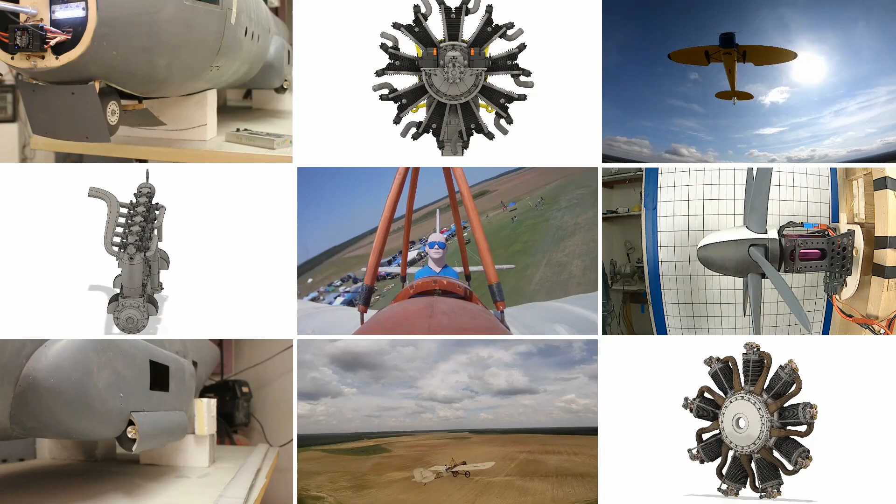Long story short, one of you followers reached out to me and said, come on Dag, why don't you do something exciting with that wall behind you with all the years you've done model aviation. So I thought, I'm going to go into all the parts and pieces I've collected over the last 40 years, like my first 3D printed radial engines on the wall. I have propellers from 049s all the way up to my 150 kV electric motors I use. I've got props I designed myself. So everything on that back wall is kind of a little bit of my history.

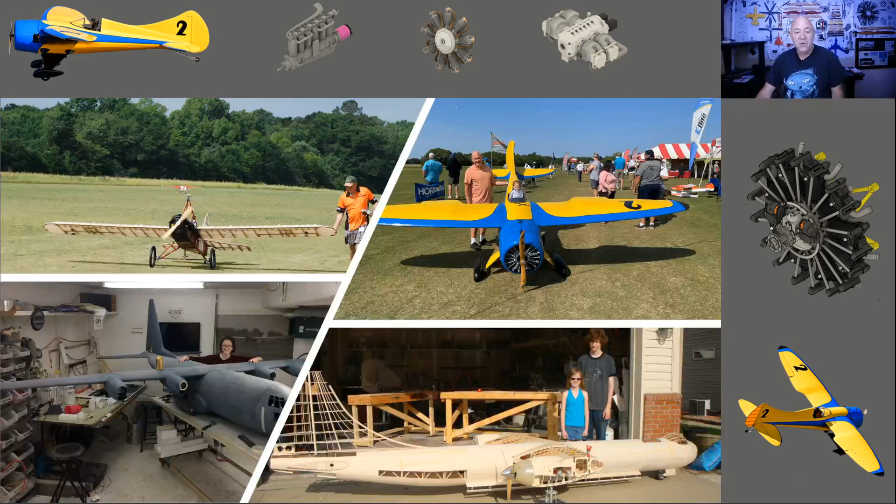If you don't know who I am, my name's Dag, and I'm obsessed with giant scale electric model aircraft. I've been doing this about 12 to 15 years. I got into electrics about 15 years ago, but I've been into the giant scale stuff for about 12 years, and I love to design my own airframes.

I would create a lot of videos on my YouTube of me designing and building my airplanes. A lot of people started saying, hey, why don't you just do videos answering people's questions and telling us how you design things. The purpose of my YouTube is to share my experiences, successes and failures. I hate it when people say, oh try this, but they've never done it, and then you try it and you fail, and you're like, well, that was a waste of money.

So I try to help people understand my path in this model aviation world and in full scale, because I'm building an ultralight too. But everything I try to represent here on my YouTube is things I've done myself. So if you follow what I do, you can have success. Now, if you follow some of my failures, you'll probably have some failures.

But the reason for this video is, I'm not really sure how to explain it, but I created a Patreon. And the reason I created a Patreon was because before that, I had created a website called atwoodaviation.net, and it's gone. But on it, I put all my drawings, all my CAD drawings, all of my STLs, all of my designs, free.

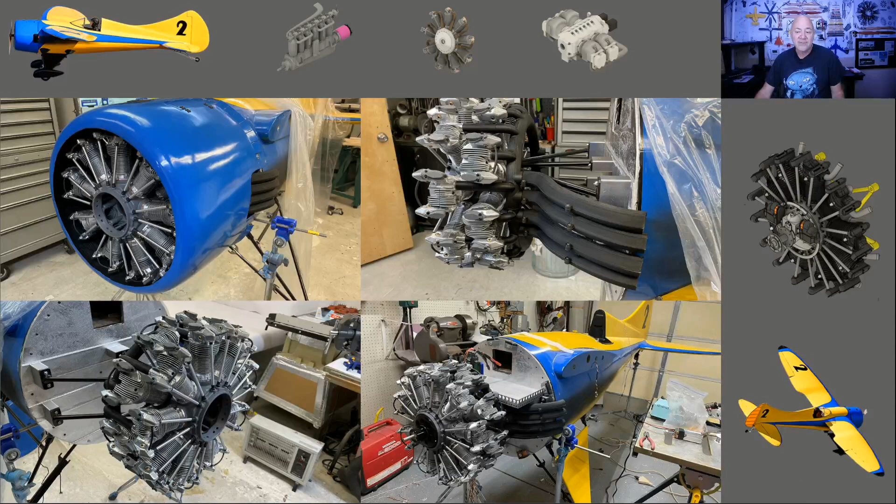One of the things I love about my Patreon is this two-row dummy radial engine that I 3D printed for my MSL2, which is a 188-inch wingspan giant scale, 1925 or 30-ish racer I invented in my head. This is available on my Patreon, but there is just so much more that I've done, and it's crazy how much.

When I think about it, I only do this in the evening from about 9 o'clock until 11 because I've got a family, I've got work, I'm not retired. And to think of what I've done the last 20 or 25 years, including all my CAD drawings, it's kind of crazy.

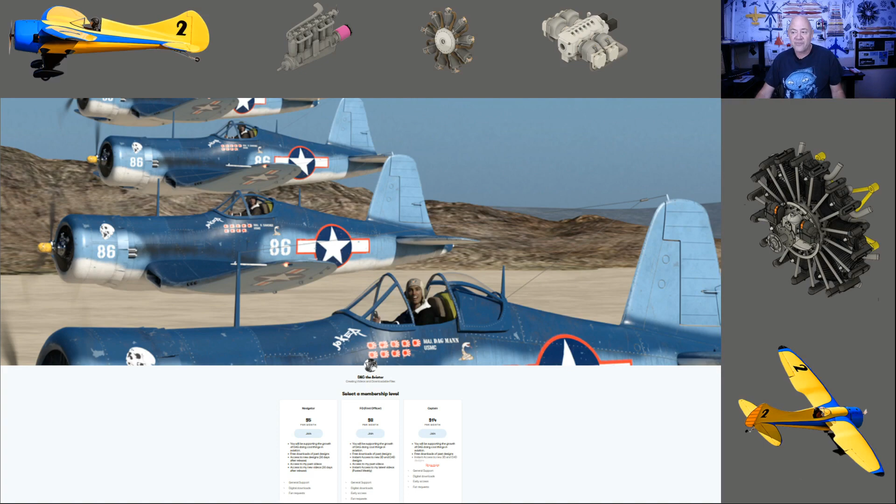So when you go to the front of my Patreon, you basically just see a Patreon front page. I do have some different levels, and I did this basically for you super fans that want to support me. For $5, you can get every drawing, STL, everything I've ever done. For $8, sometimes you'll get more advanced stuff, fan requests, like you can request that I'll do some simple STLs or some simple design stuff. And then on the $14, which is the captain - so I have the navigator, the FO, which is the first officer, if you're a full-scale pilot you know what an FO is - and then you have the captain.

But realistically, even if you join at the $5 and you need help with something, just reach out and say, hey Dag, can you do it? But if you super love that I'm giving away probably 50,000 hours worth of stuff and you want to join at 14, I appreciate that. But I'm not begging. I only did this to try to get my files out there.

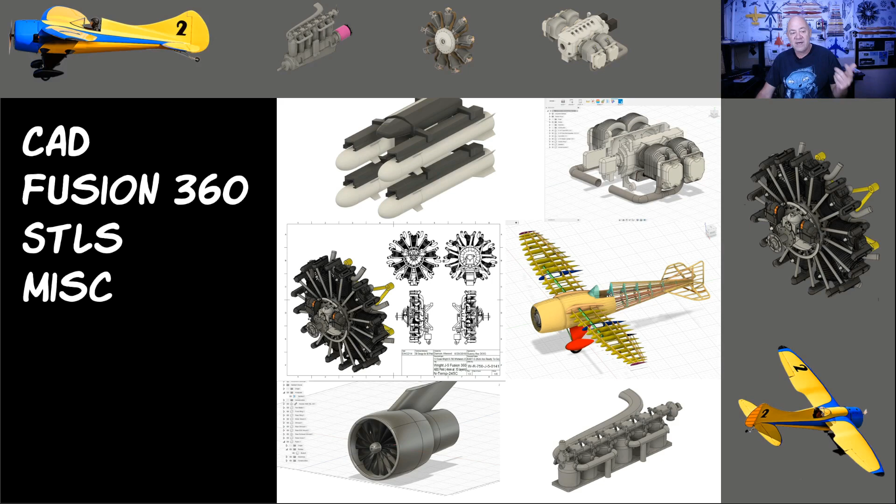So what we're going to start with is, what do I offer with the CAD, Fusion 360, STLs, and miscellaneous? And yes, I do give away my Fusion 360 files so you can scale, manipulate, do whatever you want.

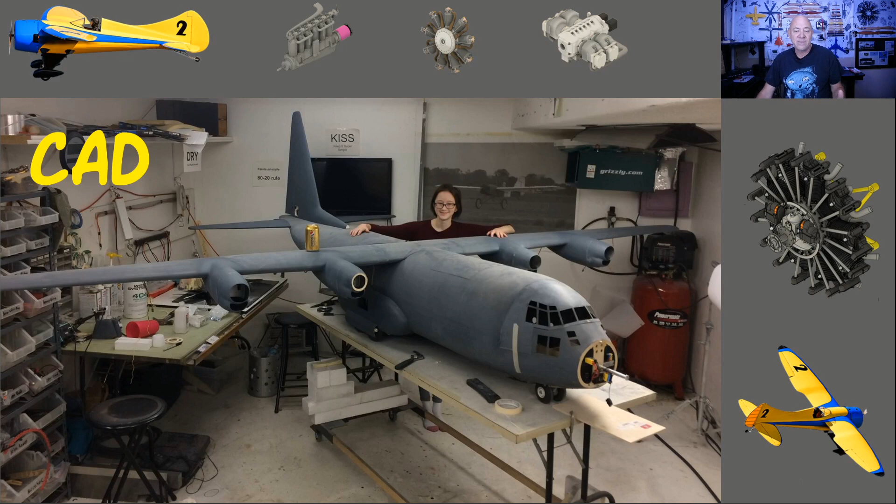So when we talk about CAD, I want to be really clear about something. My drawings are nothing like a Ziroli drawing or even a Don Smith drawing. My drawings are the drawings I created for me to build the airplane from, to cut out all the pieces and know dimensionally how everything goes. So if you download one of my drawings, like on the C-130, you're going to get drawings you could literally cut out and build the airframe. But I don't tell you what steps to take, I don't tell you anything like a good set of construction drawings would. Mine are my own personal drawings that I had to draw in CAD so I could build my C-130.

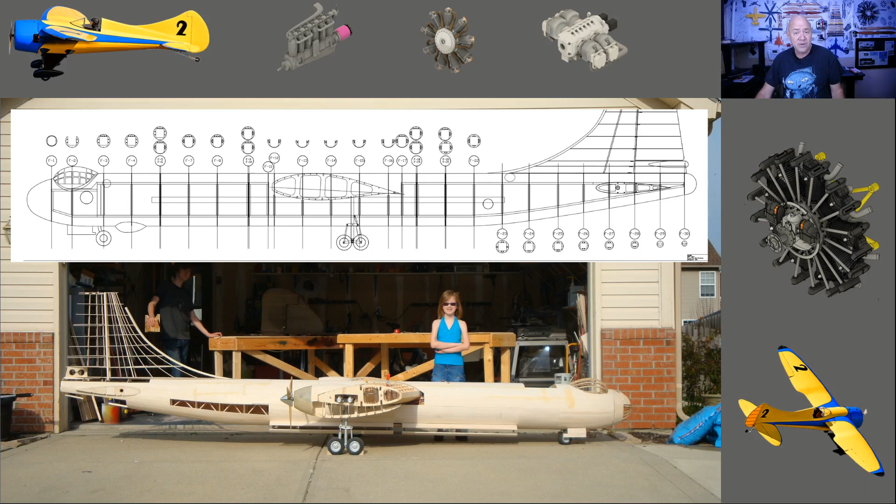Same thing with my B-36. All the parts are in the drawings. So if you want to build a B-36, here's a caveat: you need to be a hell of a builder. I've had 2 people use my C-130 drawings to build smaller C-130s, and they had great success.

I've had somebody take the C-130 drawings and have all kinds of problems, and I worked them through it. The thing was, it was basically their first time ever using a bandsaw to cut out an airframe, and you've got to be really careful and accurate. There's a lot of skills we learn when we work with wood.

So I would not recommend downloading my B-36 drawings, scaling it to half scale, bringing it from 257 inches down to whatever half that scale would be, and making that your first scratch build. I would not do that, unless you just love to have a lot of tension in your life.

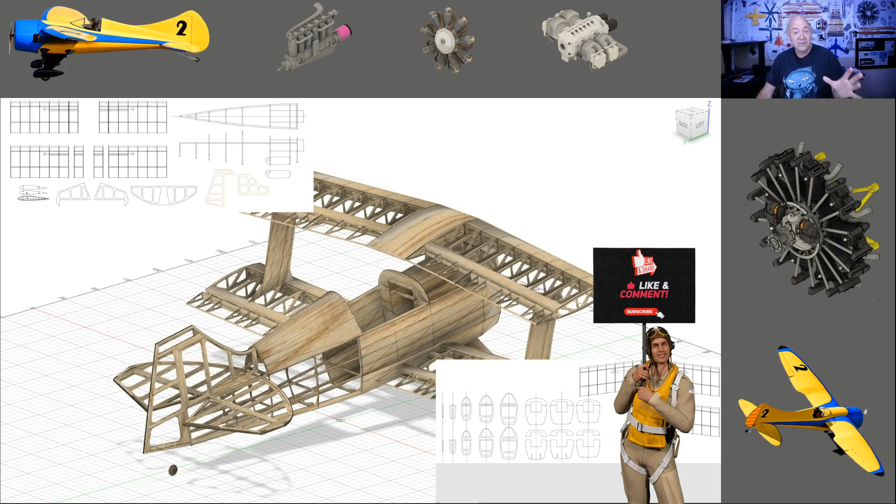My 68% Pitts, these are extremely basic drawings, okay, but you can build that Pitts. Now the thing is, these are CAD drawings, you can scale them to whatever size you want. Somebody downloaded this drawing and built a 48-inch Pitts S1, and it's a cool little airplane.

My T-28 drawings are available. This is a plane I've been wanting to build so bad, and I just haven't, I've got too many things going on. But one person has built a T-28 from these drawings. Again, they scaled them down. This is a 160-inch wingspan plane, and they scaled it down to, I think, about 60 inches.

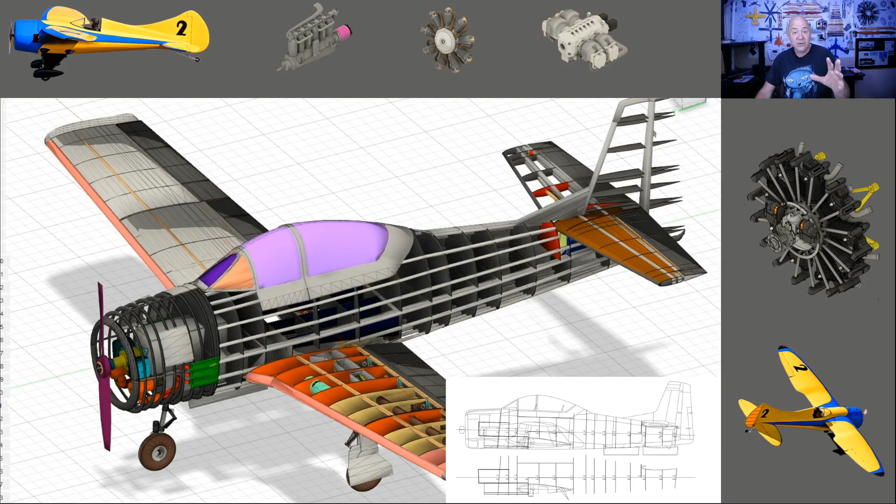Now they had to make their own cowling out of fiberglass, they had to build their own canopy, their own vacuum form canopy. But if you're a builder, these are some pretty cool drawings, especially for $5.

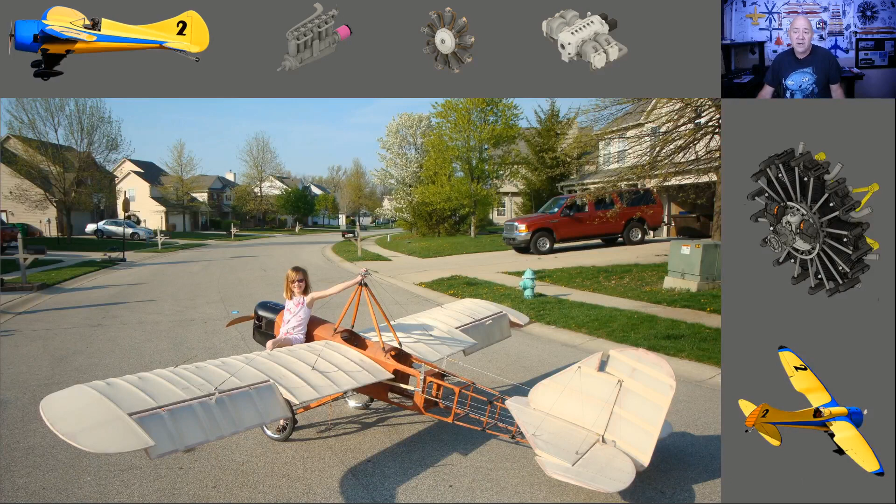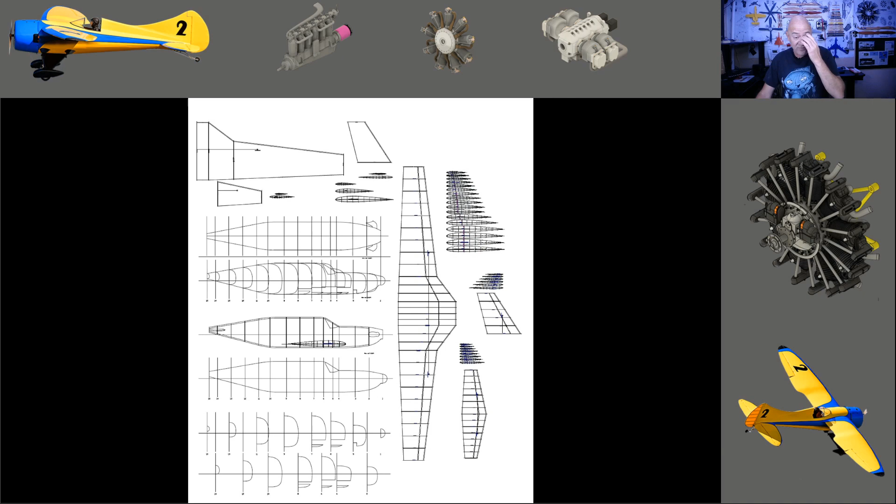A friend of mine reached out to me and said, could you draw me a Piper Meridian? And I said, why not? Now this was probably 8 years ago, but there is a Piper Meridian. The way the wing was originally designed, you used 3 ribs to foam cut the wings, and the fuselage bulkheads were to make a fiberglass fuselage. There's no stringer places on the fuselage. But if you're decent at all with hot wire foam and decent at making a plug, this is a Piper Meridian. This is now my Fusion 360 files that I offer.

For $5 to get all of these, it's incredible. There's a part of me that always wanted to sell these individually, but I got to be honest, everybody has so much fun with my engines, 3D printing them themselves.

I don't want to mention the names because they might be embarrassed or not want me to, you know, the CIA might be looking, who knows. But I have had so many people download my engines and just absolutely have a blast with them.

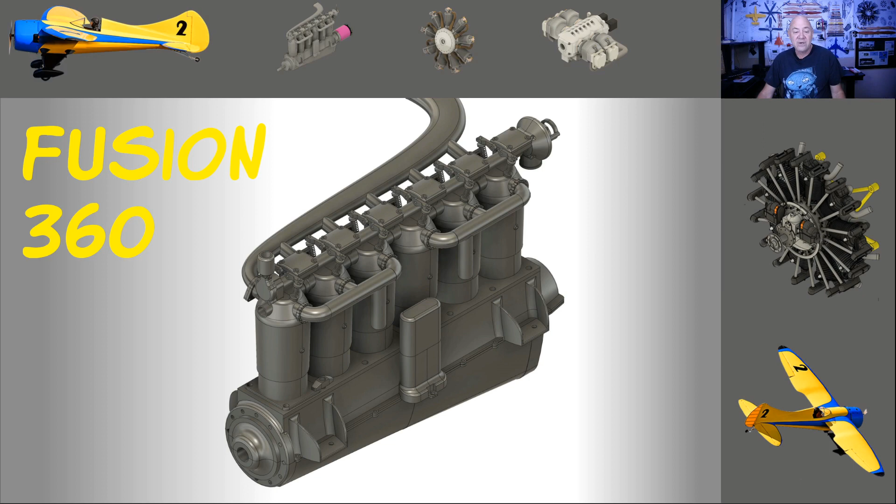So I've got my Mercedes engine, and this is a half kit, I think I show that in a minute. I've got my Continental 7-cylinder, which was real popular with Stearmans. Here's the upper half of that Mercedes engine. I've got a Le Rhône, which is really nice.

I actually have my Mercedes with the Hacker motor on the back, but I did not show the bearing placement and everything, and I'll probably be uploading that soon because I've had a lot of people want to bury a motor on the back of that Mercedes and put it in a Fokker, so it looks really super scale. I originally did this for a guy that built a half-scale Fokker. He's not done with it, I can't use his name.

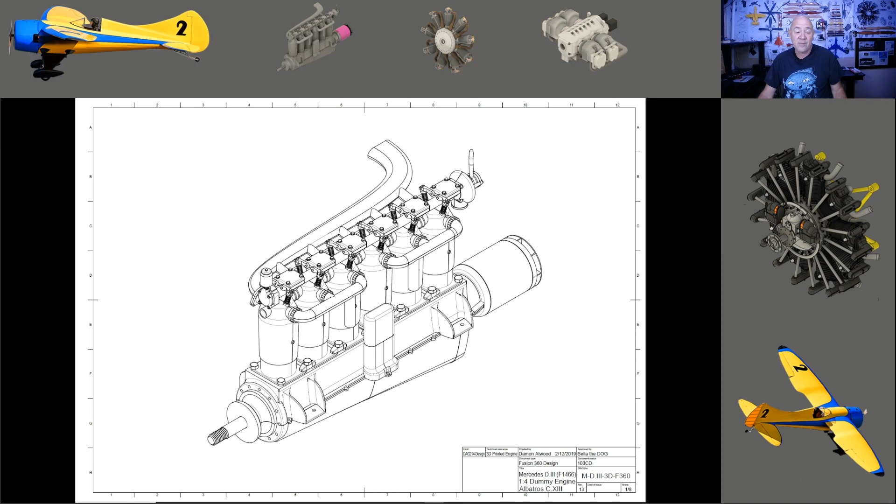We experimented with putting that A60-16L hacker motor on the back of it. It worked flawlessly. I have my Wright J5 that I designed for the guy that built the museum quality Spirit of St. Louis. This is, to date, the best 3D engine I've ever created. It was by far the most kick-ass.

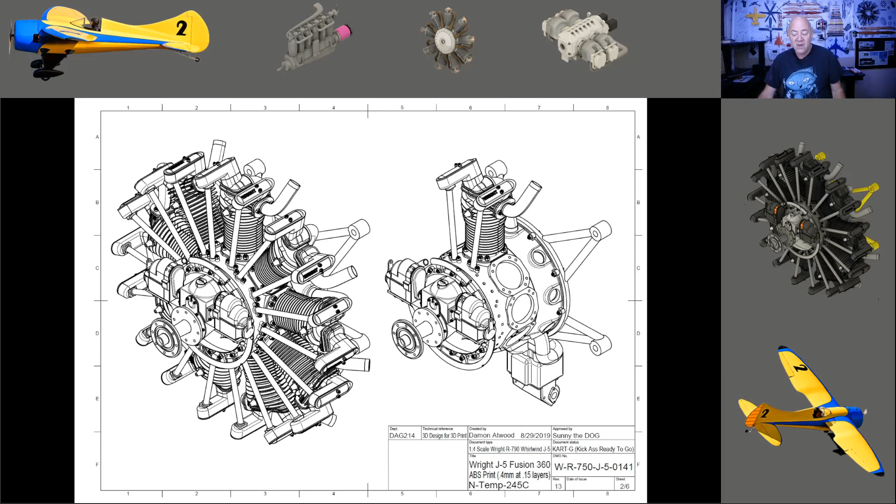I got Hellfire missiles that I designed for a friend of mine that had a Bell Cobra helicopter that he competes with, and he needed some help. I think these are Hellfires, but I 3D printed that.

I got a funky test little jet fan that I did for a friend that actually takes a Hacker A60-16L in there, but he doesn't want me to show pictures because it keeps blowing up, but we're having fun with it. I've got the World War I machine gun.

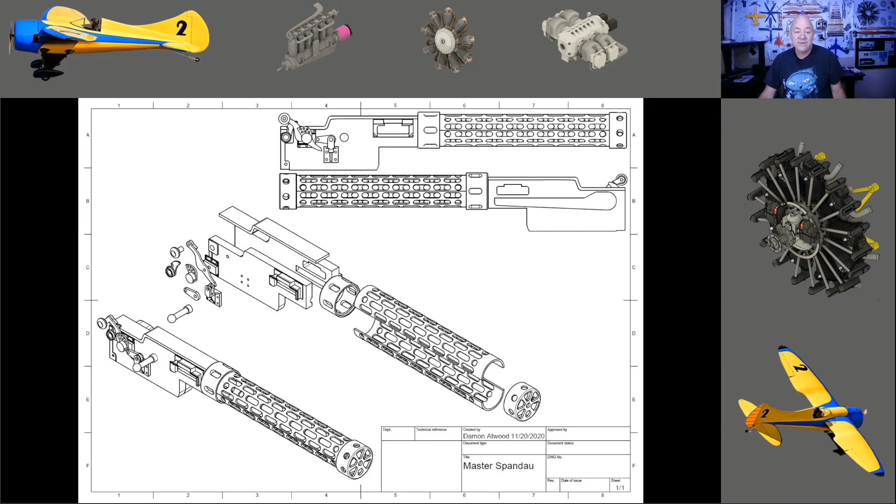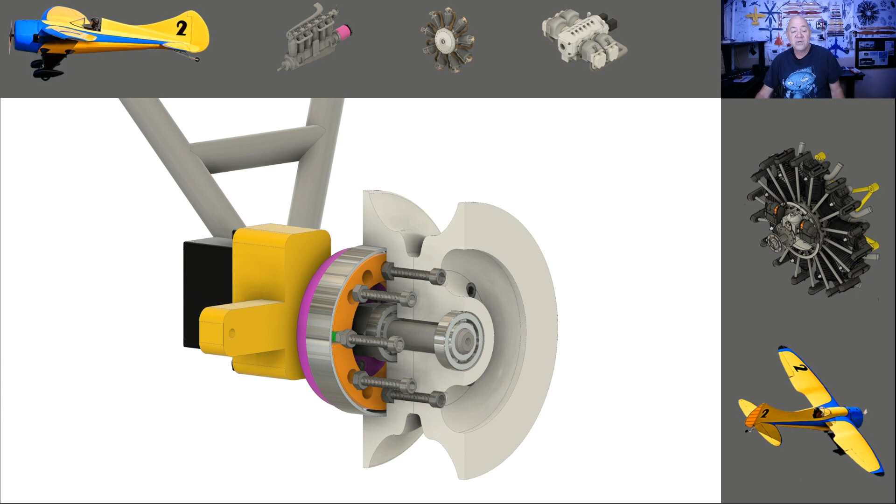I've got the brake system for my MSL2, the 188-inch, has independent brakes. So I have all of the files for that on my Patreon.

I've got some air scoops that I designed for a couple of pals.

I have this variable pitch prop system that I'm developing now. It's going really good, but I haven't shown any videos or pictures of this in development because I just don't want all the trolls coming out of the woodwork telling me I'm doing it wrong or how I'm supposed to do stuff.

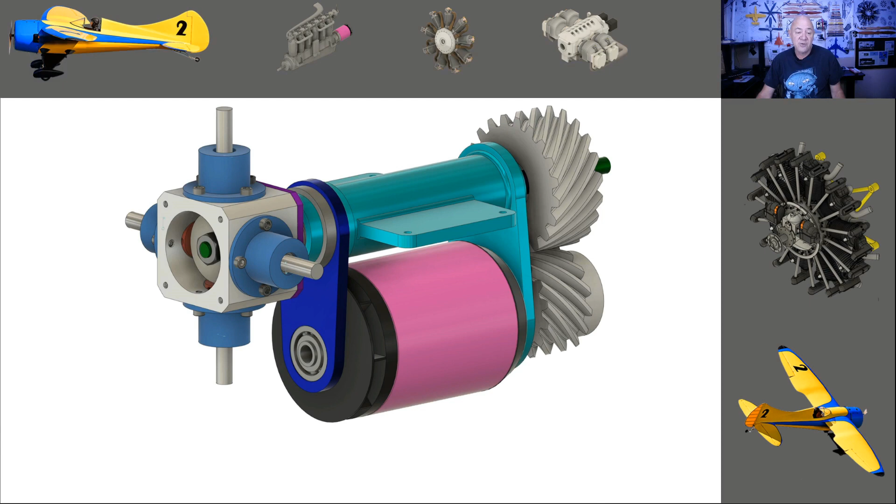But this is moving along pretty well. It's a variable pitch, so you can put the prop into beta and back up the airplane on the ground, or slow it down if you're in a dive.

Believe it or not, I put the B-36 bomb bay doors in here as 3D printed parts, if you want to learn how to build bomb bay doors.

I've got the flap system for my C-130 in here. I've actually got the main landing gears for the C-130 with those little micro brakes.

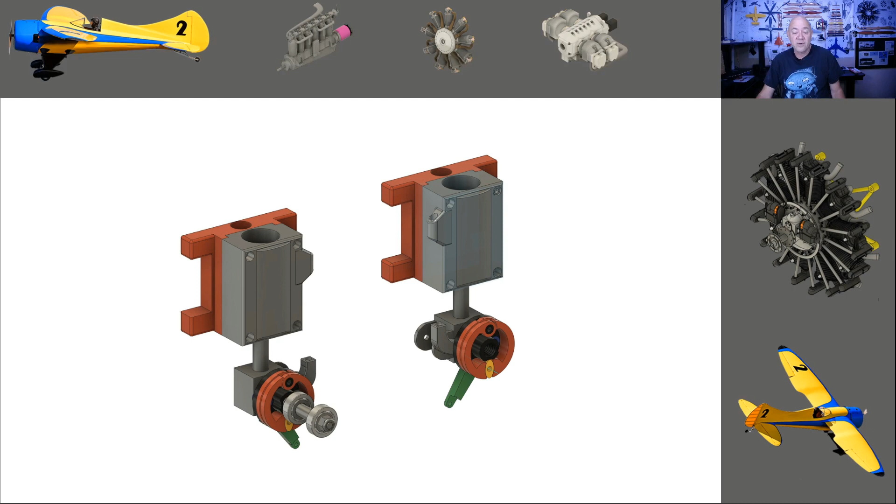I have some generic exhaust systems that I made for the MSL1. I have another funky little air scoop. I've got a funky little vent.

I did a series of different little bitty cowlings. If you wanted to build a little foam airplane and find a cowling that fits it, these are the cowlings that go on it. Some of them are really bizarre.

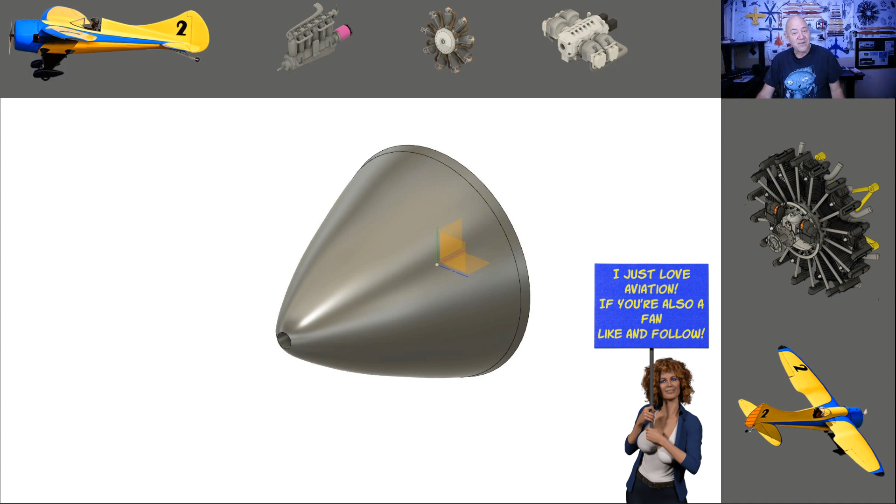I've got my spinners. Now, I need to warn you, if you do the things I do, you're going to have a freaking blast. You're going to have an awesome time. But I have to give you a little bit of a warning.

I have 3D printed a lot of spinners for pals, and none of them, knock on wood, have blown up yet. Not one of them. But I'm not telling you that if you 3D print them, yours aren't going to blow up.

So I do not sell these - I use these as static spinners that you put on your model if it's on a static display. But I would not recommend spinning these up, because when I 3D print, I know how to get the temperatures right for adhesion.

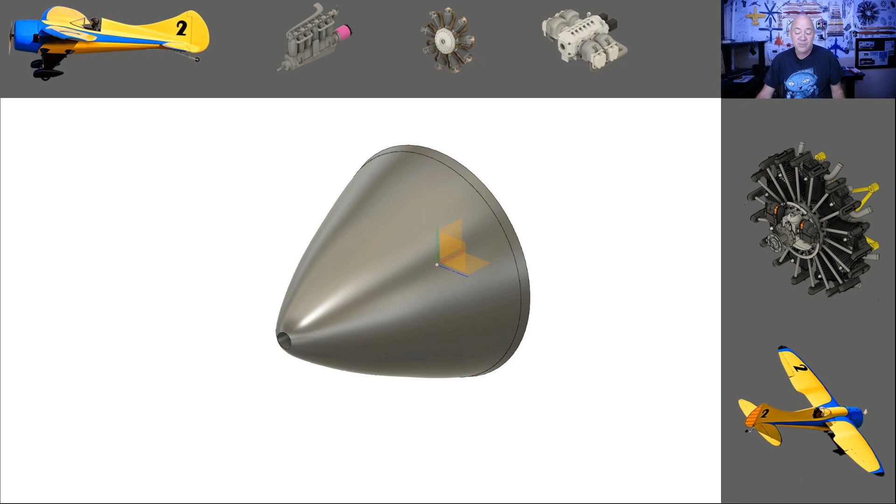I use higher pitch props to keep the RPMs down. There's a lot that goes into it. So by no way am I endorsing or condoning anybody using any of my spinners as real spinners, even though I do. And this is my 6-blade spinner for that 6-blade prop that I built for the C-130J version propeller.

That is, I think, a P40. I don't know what spinner that is. I don't remember. These are Mozzie spinners.

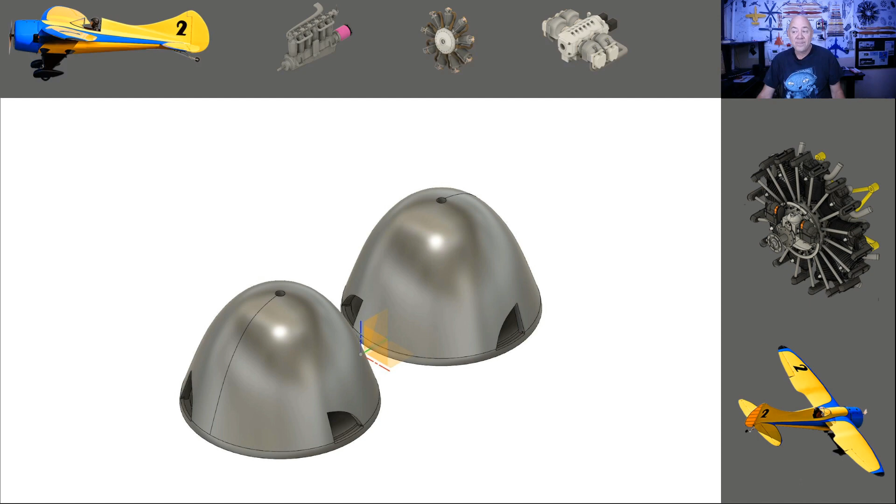To round out the Fusion 360 stuff, I've pulled a couple of airframes into Fusion 360 from CAD. I have my STLs to talk about now. These are STLs at the scale I built this engine. Be careful when using STLs, because you might end up printing a third-scale engine. Make sure when you bring it into your slicer, you check what size it is, then figure out how you want to size it.

Most of these engines are available as Fusion 360 files. If you're on my Patreon and see something as an STL but can't find it as a Fusion 360, and you want it shrunk or scaled, just send me a message through Patreon and I'll readjust it. It takes me 2 to 3 weeks to get to it.

I want to be honest with you. I normally say I'll get right to it, but honestly, I'm doing so much for people, and all this happens between like 9 and 11 at night, folks. I've got a job that takes a lot of hours in the week, and I've got a family that's kick-ass—I actually like my family. So all of this happens on weekends, or between 9 and 11, or 9 and midnight. Sometimes you'll see me post on Facebook at like 3 in the morning. That just happens to be when I'm up doing things.

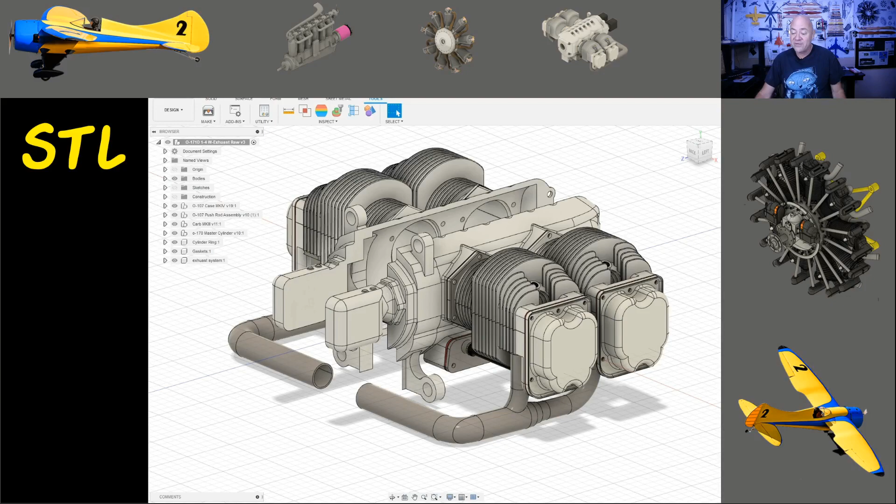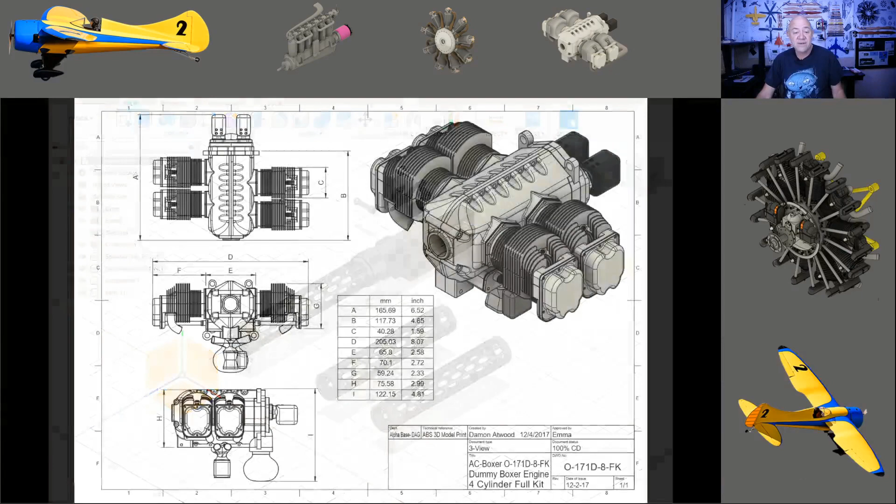This is just the front half of a Radial, an STL I was playing around with. Here's that Continental as an STL. The Le Rhône is STLs, the Wright J5 is STLs, the Machine Gun is STLs—all of these engines are STLs.

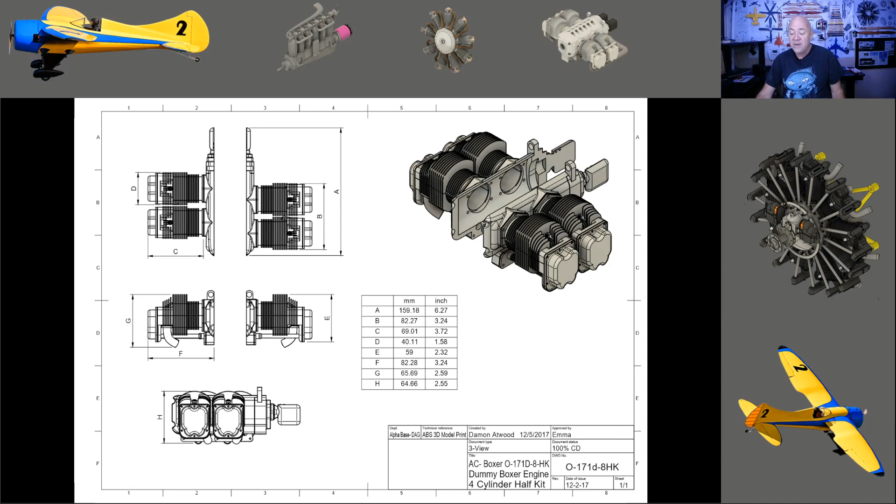This is the outer half of a Cub engine—I call it the one-half Cub engine. It sits on the outside of your glow engine, gas engine, or electric engine. I've had more people 3D print and put these on Cubs than anything I've ever invented. It actually started as a half-scale project for a half-scale Cub. If you've followed me, you've seen what these look like 3D printed and painted up with a spark plug and wires—they're just sexier than hell. This is another half-scale version I did with the exhaust. It's really, really cool.

I've done some bombs that are pretty cool. They're a little heavy, which in RC you actually want, so they fall to scale. If you drop your bomb and it flutters like a feather, that looks like BS.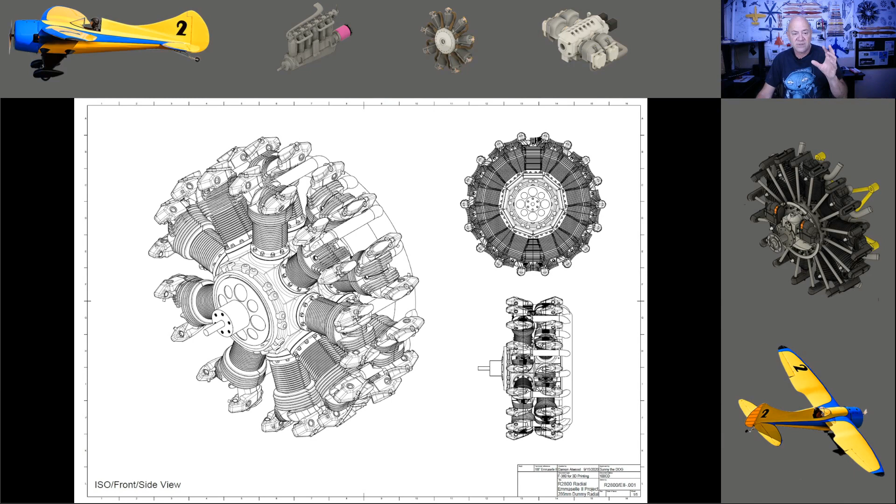The twin row radial engine I 3D printed for the MSL2 is available as STLs, but you'll want to rescale that—it's a 26-inch diameter engine.

STLs for the top half of the Mercedes—this is the second most printed engine that I designed. I have some exhaust headers you can scale for different planes, I think the P40 and P51 are the ones I designed.

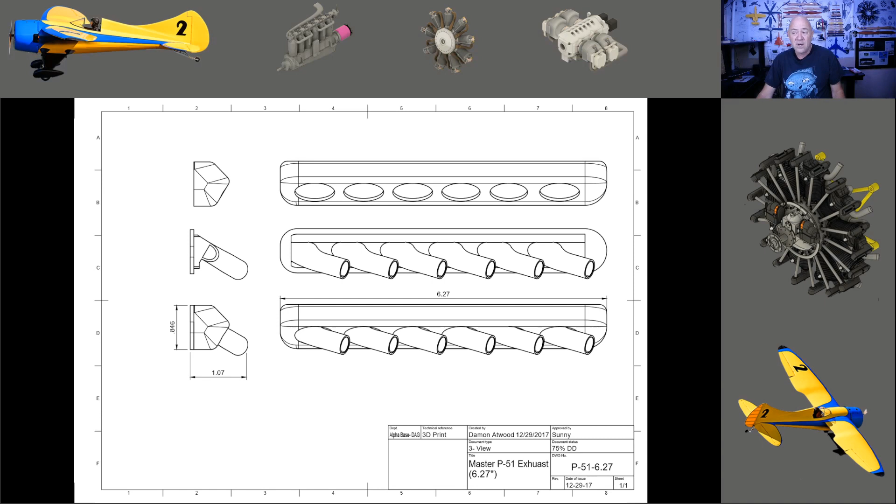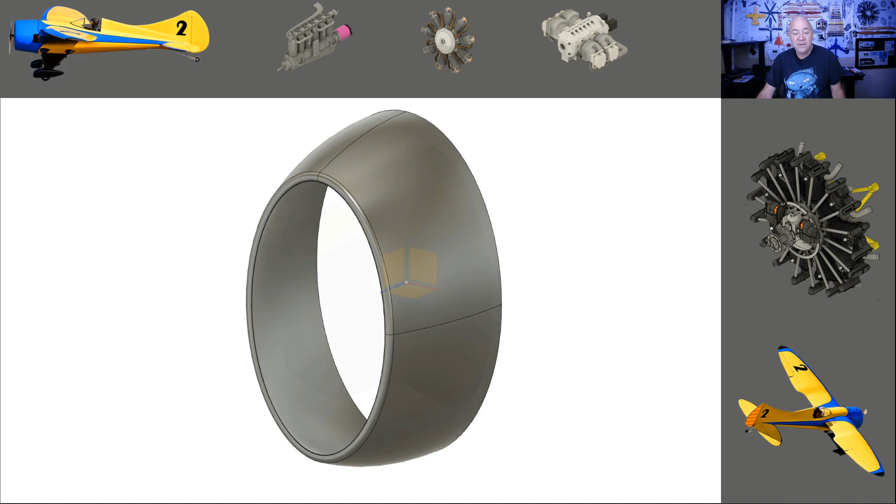STL for the supercharger/turbocharger thing. Same deal—just about everything that's Fusion 360, I've got as an STL too. All of these are STLs, you can just take them into your slicer, scale them, turn them into G-code, and print them. This is kind of neat.

This is static—a Hamilton hub for a 4-blade prop on a Thunderbolt P47. A guy I can't name, because I did this on consignment for him, but he doesn't mind that I sell these or put them on my Patreon. I spent a lot of time getting one of these scaled, believe it or not, half scale—he made a prop that stuck on the side of his activity room in his house, and we 3D printed it in half scale with like 50 chunks. I've since scaled it down to, I think, about quarter scale, or maybe even fifth scale—I don't remember.